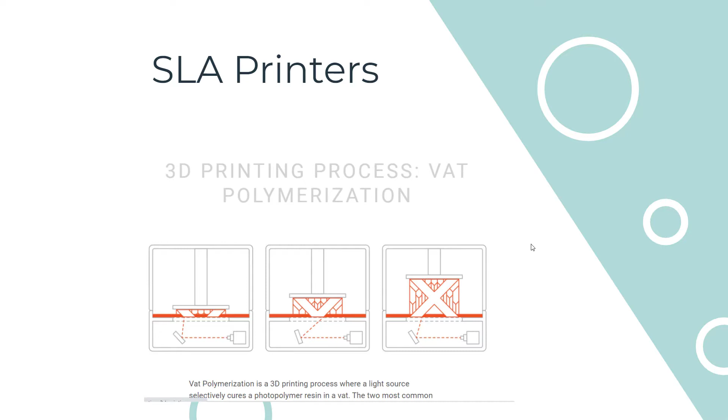All right, another type of printing I wanted to talk about—again, there's lots of types of printing. I've seen printers that do ceramic, printers that print metal, industrial 3D printers. But the other way printing is done that I want to talk about is these powder bed fusion printers, which is what you see a lot in medicine.

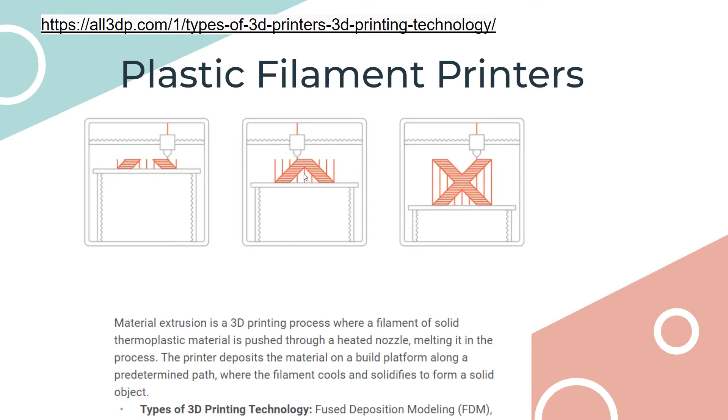So you've got a source of thermal energy hitting a bed of powder. In these prints, your print comes out of a bed of powder. That comes in handy with supports, because if something doesn't have a layer to build on top of, it will fall apart and plastic will ooze out of the nozzle. But when you have something like this, it doesn't need any support because the powder, like a sand texture, supports it, and you just lift it out of the sand as a complete structure.

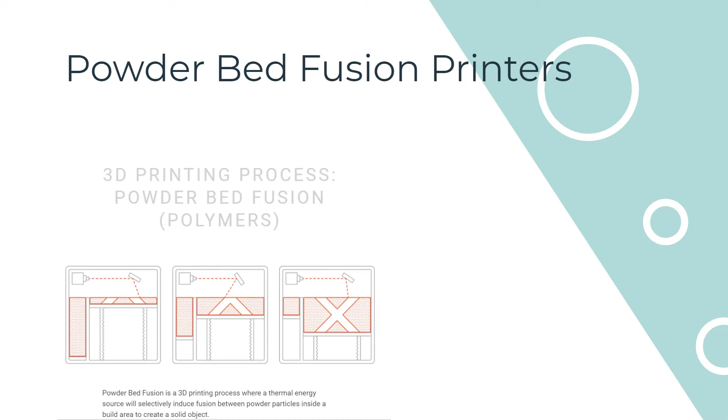So those printers can cost hundreds of thousands of dollars. I'm guessing it's about $500,000 for one that's about the size of—and they're huge. I've seen one that's like the size of a telephone booth. I just want to point out that there's more to 3D printers than consumer printers. I never want people to think that when we talk about 3D printers, we're talking about some little two-foot cube that costs $2,000 and is used in schools and libraries.

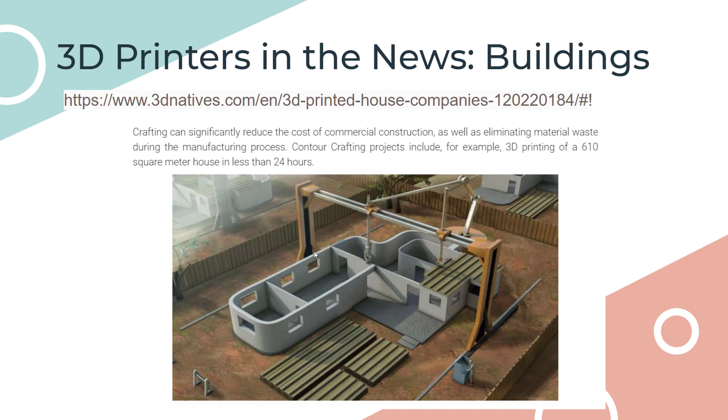This is the way a 3D printer could be used to build a house. There are some construction companies that do this. Just like the nozzle has plastic coming out of a filament nozzle, this has cement—same idea. The bar uses XY coordinates, but it's basically saying up, down, left, and right, depositing a layer of cement instead of plastic, following a pattern, and building up walls just like we build up walls with plastic printers.

Same idea. The other place we hear about 3D printers a lot is in food production, which I'm not going to get into, because I'll show you a cake nozzle with icing that kind of shows you can call anything a 3D printer.

But I do want to talk about the hype around medicine. I hear a lot of people talking about how they can print bone with a 3D printer. The little bit I know on the topic is that what they're printing is a material that helps bone graft onto it very well, but they are not printing bone per se. So if you go to your orthopedic surgeon wanting a disc made of your own bone printed on a 3D printer, they will turn you away, at least at the time of this recording in 2020.

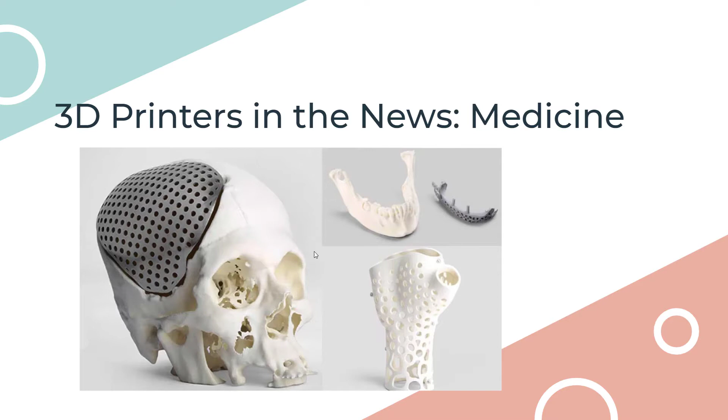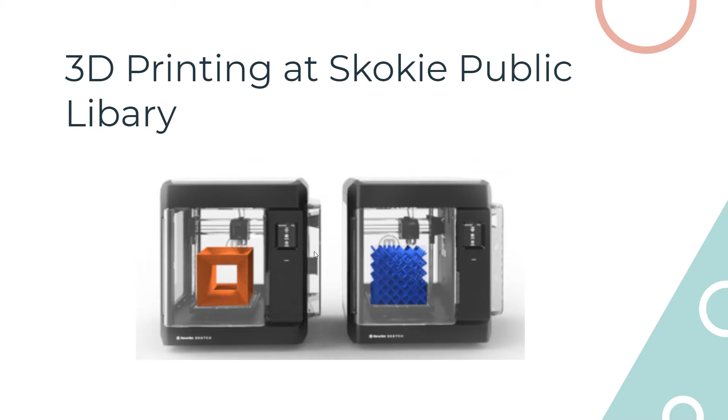The lecture I did this week was for the 3D printing program at the Skokie Public Library, but I think it has some overarching principles about how to upload and find a place to print your prints for free that are worth talking about. First, if you're willing to pay a good amount of money, there are places like Shapeways that will make your print for you. But your local library may have a program—Skokie's is extraordinary, and if I may, I'll take you to the site.

This is their 3D printing program, and they have a 3D printing request form. I only show this because there's going to be a moment where you're interested in 3D printing and you need to send your file to someone.

I want to show you that the principles of sending your file are the same as any other type of file, like a photo file such as a JPEG, or a Word file, a doc. There are a few different flavors and formats, but for this site in particular, it says we only accept STL files. So you would simply choose your file from your computer and pick it out.

Then you upload it. In this case, with Skokie Public Library, you would put in your name and email, and they have a limit to how much they do every month, but they would do your print free of charge. So I do want to highlight that program.

I also want to highlight that program because when I was doing this lecture, we geared a lot of the questions towards getting started with these things. So when we talk about file types and STL files, I'll talk about those later in the lecture, because this lecture goes from big to small — big things about 3D printing, but then it gets into the nitty gritty of file types and some of the more tedious things that have to be dealt with.

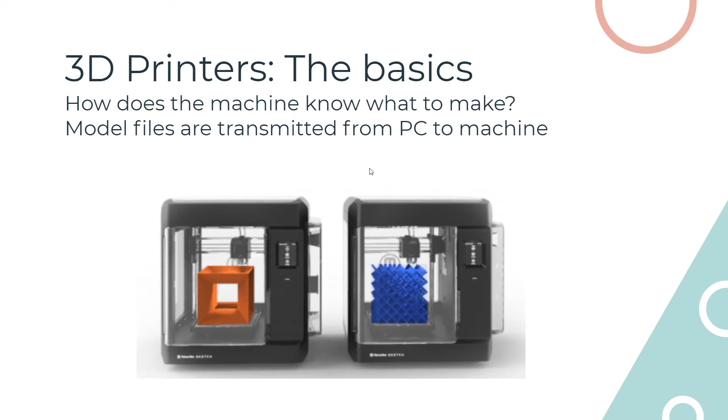So what I will do now is switch to a video I made that I will do the voiceover for and show how this works. I go through this very quickly, so I'm going to pause a few times as I go. But what I'm showing in this video is the workflow if you wanted to download a ready-made, ready-to-go printable file from Thingiverse. I start with the Thingiverse site and hit download all files on what I've selected.

Pick my spot on my computer, extract it — and that's where you do need to have enough computer skills to know how to download a file from the cloud and extract it. But once you do, you can find a 3D file viewer, like I have here. Open the file, and then you'll see this is the body of an owl.

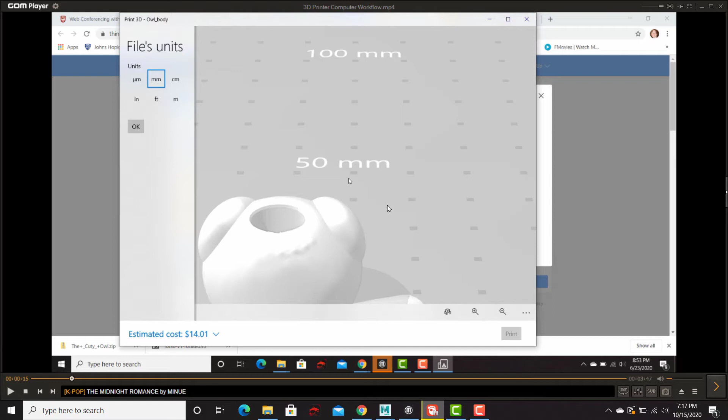It's a simple print, so we're going to see it in the viewer, and you can rotate it and look at it from a couple sides.

There are a few different types of software. I always say 3D printing gets pretty confusing pretty quickly because it's very simple — you've got your 3D printable file and you just have to manage it like any other file. But if you're going to print it yourself, that's different. If you're going to send it to a place like the Skokie Public Library, you take your file, download it to your machine, and upload it to their system.

But if you had a friend, or you knew somebody with, in this case, a MakerBot, you have to put it in the software that translates the file between a computer file and the brand of printer you're going to be working with.

So every printer needs some kind of slicer. That's what they call it, because it slices the print into layers and generates a special kind of code that the machine can understand. That code is called G-code. These slicers give you a very intuitive interface — you import your file, set up your settings, and then it conveys those settings to the printer.

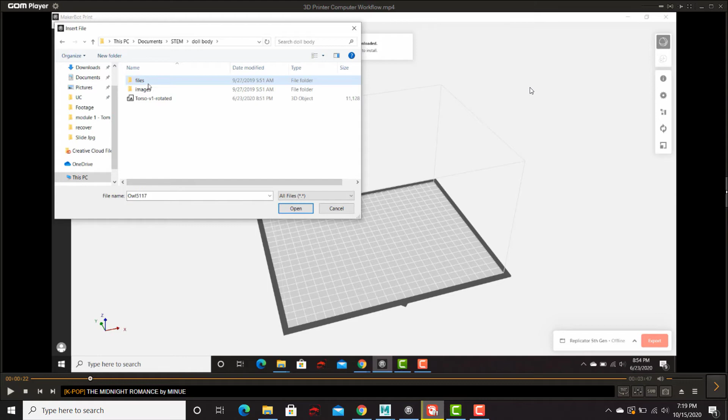Things like how thick you want your layer, if you want some sort of platform on it to help it print better, if you want supports, which we'll talk about in a little bit. Those are all the things that you would convey in your slicer software that would go into the printer as it makes decisions about how to print your print.

So I'm importing it into the MakerBot software. There's lots of different kinds. There's also wireless systems that send it to the printer. So that was how to do something on Thingiverse.

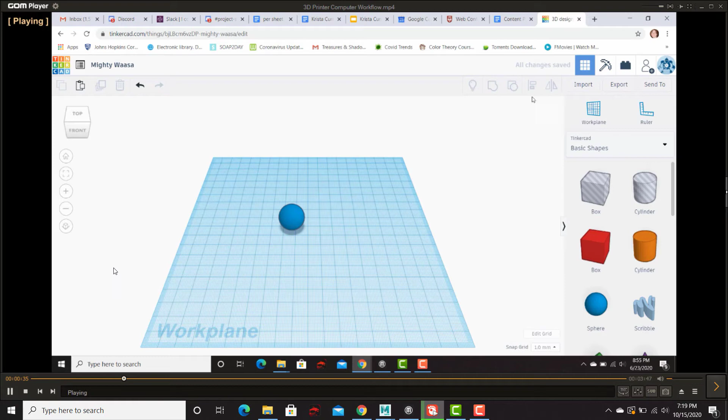I also do teaching about 3D printing and modeling where we do things in Tinkercad, which we'll talk about in a little bit. But here I'm doing the workflow of having made your own creation in Tinkercad, and this is how to export it and again put it into slicer software and send it to a MakerBot.

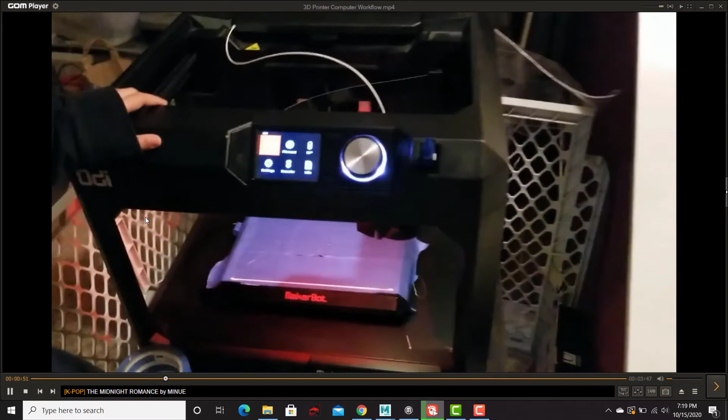So you just export it. In this case, I picked OBJ as opposed to STL, and it's on my machine. I transfer it using a USB device. See right here where my mouse is pointing, that's the USB drive. The printer has a USB slot right here, and that's where the file goes from your computer into the machine.

So this is what we call the bed. This is the interface, the knob that helps you control the settings and the settings.

So now we're going to get started with the printer itself. The first thing it has to do is make sure that the filament is melting properly. It's going to go through that nozzle, and it's going to be the right temperature. It's just going to all work.

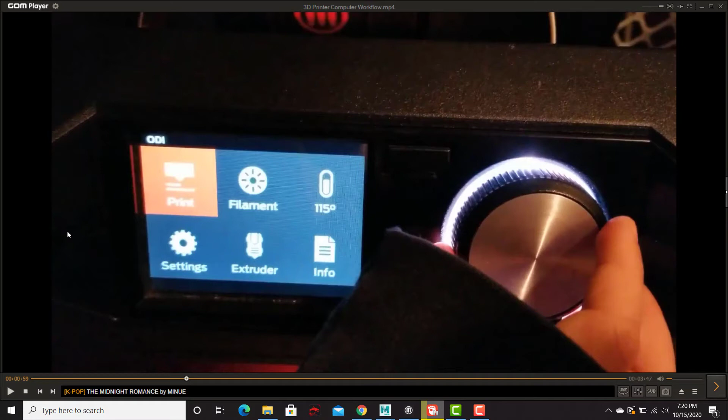There's a piece of the printer that we'll talk about in a minute called the extruder, and the plastic comes out of that. So the first thing you're doing is putting in your filament, which is the spaghetti looking stuff that's going to melt. And so you load your filament.

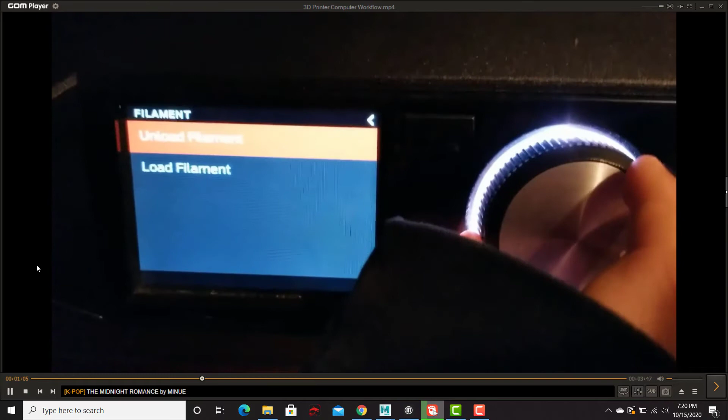What I'm showing here is that you can see the temperature is 115 Celsius currently, and it has to go all the way to 215.

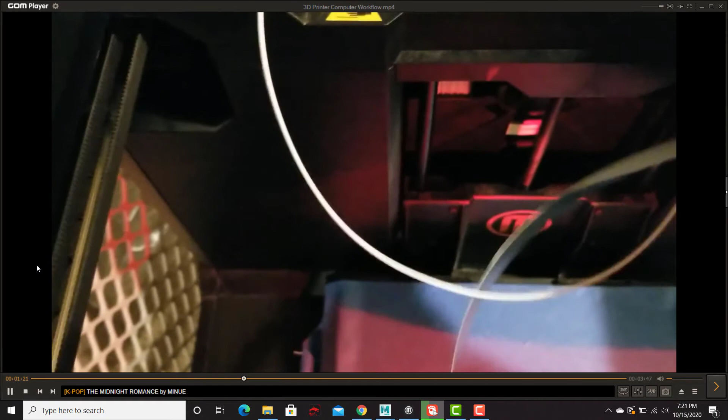So setting up your printer and getting ready to print takes about 10 minutes just to get your print working. It's just something people don't realize when they're going to make a 3D print, that there's a lot of waiting around and waiting for things to heat up and cool down.

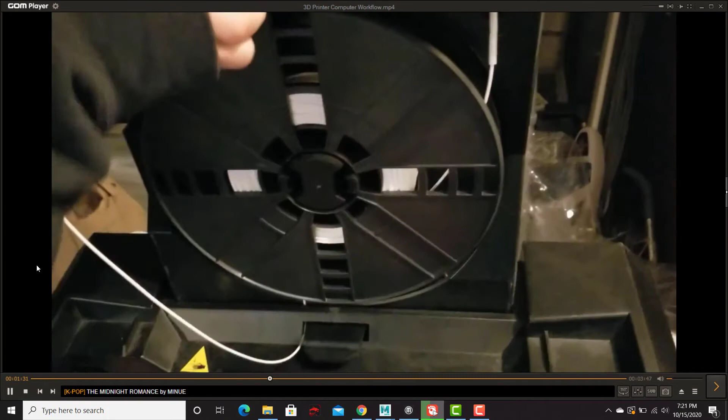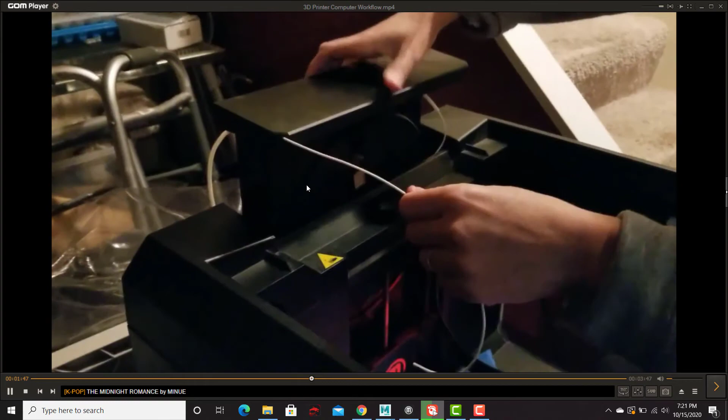This is the spool of filament, and the filament comes out of the spool, kind of like a film reel, and it goes through a connecting tube which connects to the extruder. So when you run out of your spool, you put in a new spool.

This is a very important part, the tension of your filament, this is for those of you who are going to be actually doing a print someday. This does not aim to be comprehensive training on how to do a printer, but you can see some of these considerations. This is where you slice your filament at an angle, so it has that nice sharp tip.

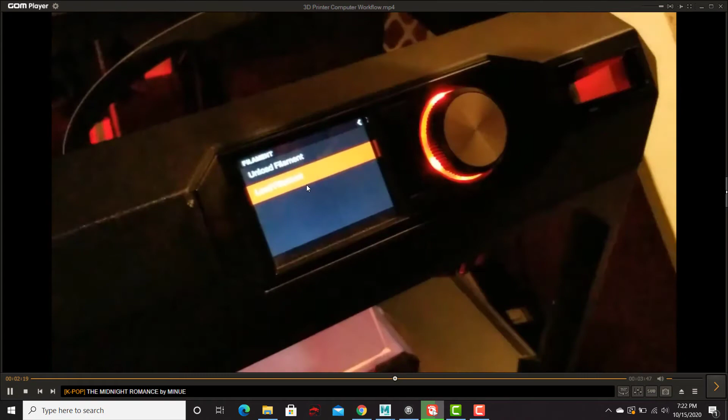And then we're going to show that we're ready to load the filament. The Smart Extruder is ready to accept the filament. You take it, you put it in the little hole, and you feel it pulling it in.

Eventually the filament comes out the other side as this melted plastic. You can see it kind of streaming out of there, and that means you've got a good flow going and your printer is working well. You can see it's dumping plastic all over the floor. That's me doing it with my hands and remembering that I'm doing this for the camera, so I need to cut it with the scissors.

And your printer is ready to go. The first line that it does when you hit print is a thin test strip. This is where you pick your print. Again, it was on that USB file. And we're printing a doll head.

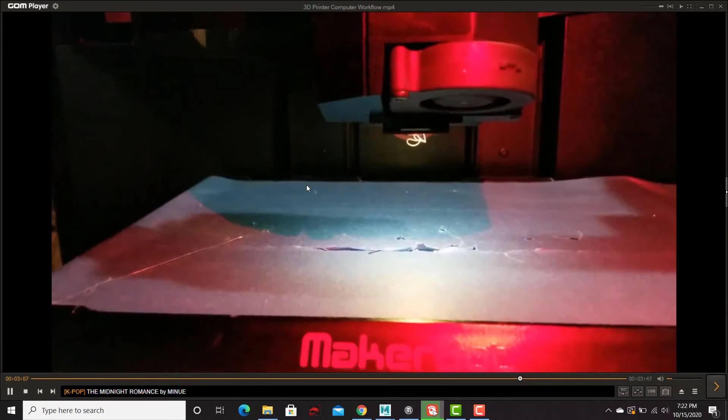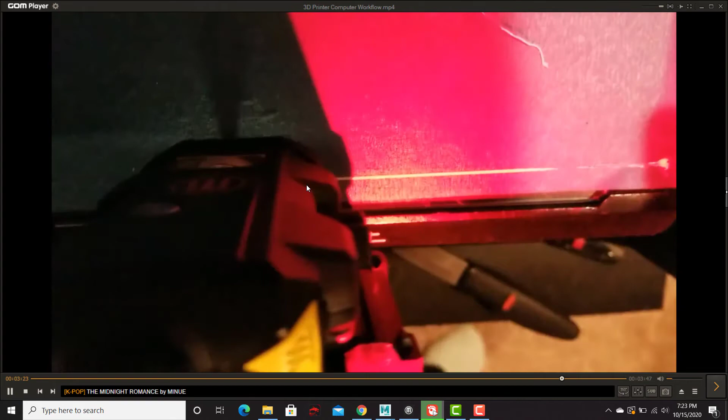This is our painter's tape that protects the bed. That is the extruder coming down towards the bed, getting really close to depositing that first layer. You can see the first layer getting printed right there. That's this test strip, and that's how the printer is making sure that everything is set up and ready to successfully print, starting with the first layer. This is footage of it printing.

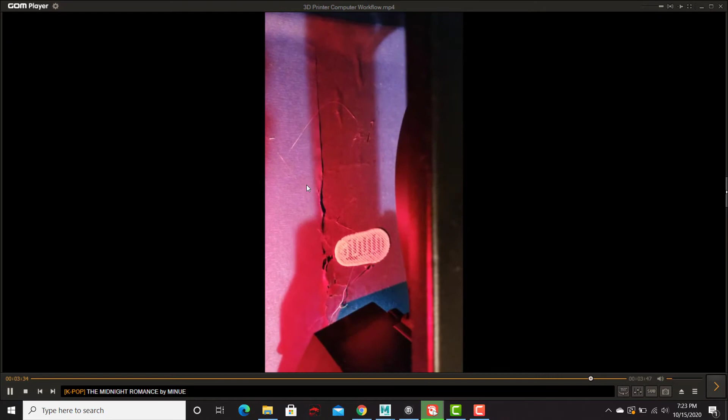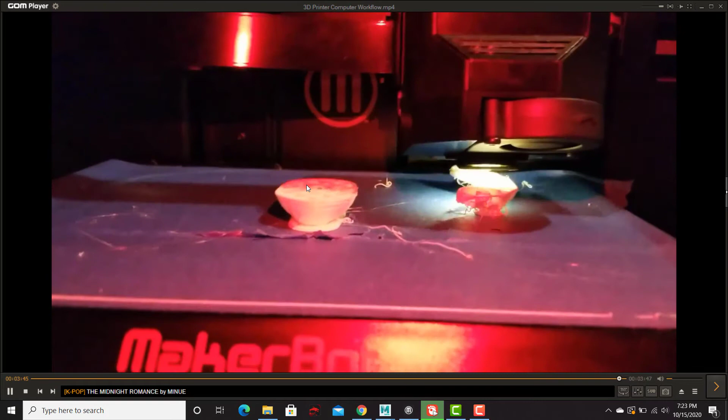You can't get close up to show the nozzle when you're doing this. Here's a little clip - I don't think you can hear the sound, but the printer makes some crazy noises - and that is the print. So that is the workflow of the 3D printing machine. We can't do a live instruction to show people how to use a 3D printer, but we can at least show that video so you know what it would look like if you were there.

All right, so this is the close-up of the nozzle. As I mentioned, you can't make a video of that nozzle coming down, so I do this instead, if you're ready. This is my demo of what it looks like when a nozzle is extruding plastic resin close up.

I use icing and this plate to represent the print bed. This is what's happening, and I explain this because I will show you how to design your design for 3D printing based on the physics of what happens.

The printer only knows a few directions: front, back, left, right, up and down, and that's all it knows. So it's going in those directions, or a combination, to go diagonally. It gets the direction to go to coordinate X 125, 250, and then it's told to go downwards. So it goes downwards, and then it's told to go to the left, and then it's told to go to the right, and it makes its first layer and comes to a complete stop.

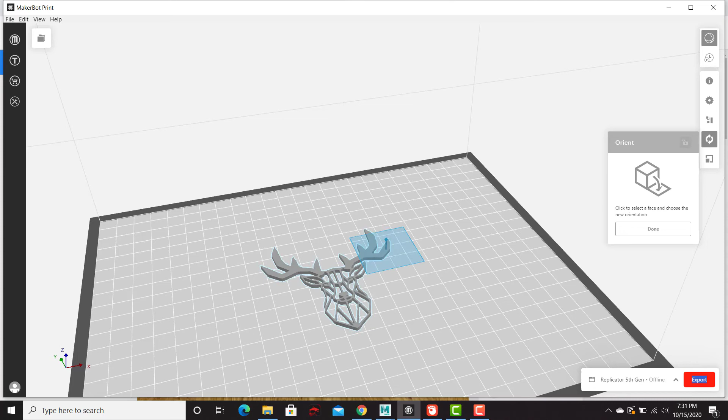So again, we're back in our slicer. This is a very easy to print object. It just is a flat surface. There's no problems with this printing.

This is very likely to be a successful print. But say for some reason, for the sake of your print, you needed to print it like this. That would be very, very challenging for a printer. The printer would not be thrilled about printing a shape like that, because you can see where it'd be putting a lot of extra filament onto the bed and just dripping it down.

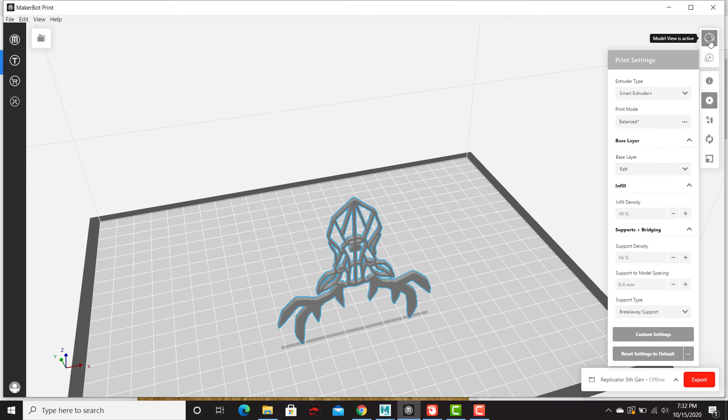So what you do is you're going to build in supports. It's kind of like a call for help. These supports are cumbersome and a little bit difficult to pluck off as of 2020, but this is the way it is done today. So you would specify that you want supports, and then I'll show you what those supports look like in the print preview.

So those are your supports. You can see that it would deposit a tremendous amount of plastic just to hold up your shape.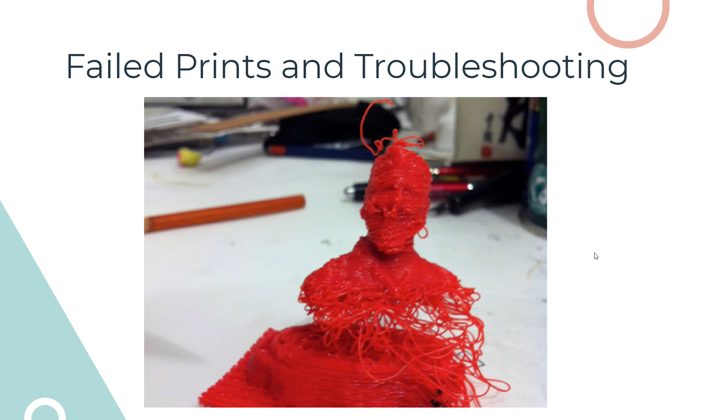So I mentioned failed prints, and this is a good example of what a failed print looks like. Again, when the nozzle has just been depositing plastic into thin air, it tends to look like that, and you can see that it's ruined. And you don't try to fix a 3D model, you just print it again.

Okay, the final part of this lecture is what I spent a lot of time on in real life, but it's the topic of making your own models and prototypes. So as we talked about, you can go on different sites and you can download models, buy models, but it's funnest if you're interested and if you've got something you want to make, making your own models.

So the rest of this lecture is pretty much dedicated to helping you understand the right software that you should learn to make your model. The reason I belabor this is that what I'll show you about these different software programs is that all of them are completely different. And if you learn one type of modeling software, you've literally learned one type of modeling software, and that will not help you at all when you learn a new software system. You will literally be starting over.

So I'm going to show you a little bit about how all of them think about design differently, and how you would really have nothing that carries over from one program to another. You would have ideas about ideas like resizing a sphere, but how you do it, you'd have to learn in every single system. So let me start out with talking about the software that I use when I teach kids how to do 3D modeling.

This is Tinkercad. Tinkercad is the simplest software that you can use. You need a login to start, but you can pick any object in the gallery. I'm picking something I made already, and I am opening a file.

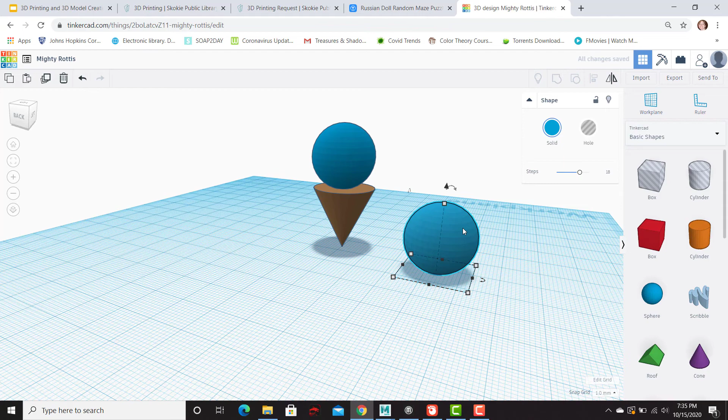As I always teach everybody, when you click on the object, you can see almost an iconic set of directions. You have to learn that the Hershey Kiss means you pull it up. If you see these arrows, that means you rotate it, which won't look like anything because it's a sphere. These things here resize it, and then you can rotate.

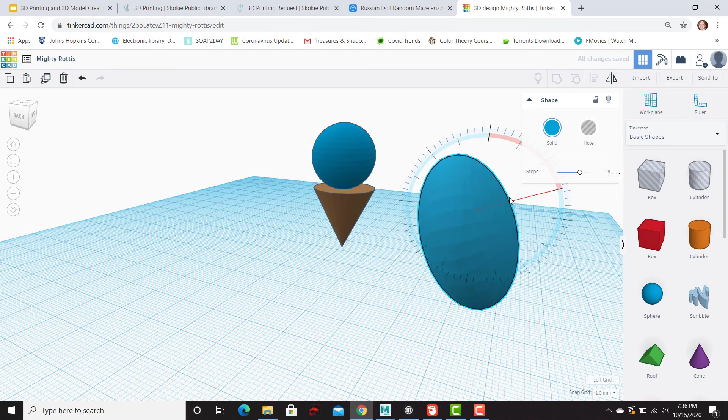So those basic movements of moving, scaling, rotating are in every piece of software. And that's about all they have in common.

The next piece of software I want to show you is Autodesk Maya. This is what I've used the most, but again, I do video game design and my focus hasn't been on 3D printing when it comes to model creation. I just want to show you the huge range, like the difference between professional software and children's modeling software. The demo I always do is the following. So I make a shape like this.

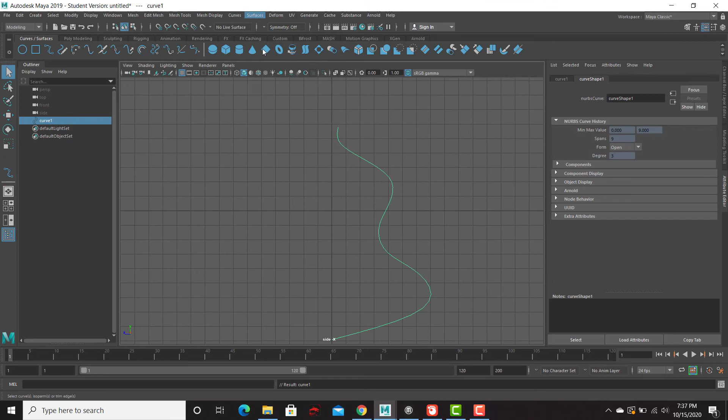And so I have my shape, and imagine this as a pottery wheel on this axis, spinning around to make a shape that would almost look like a vase or a ghost. So you say surfaces, revolve, and it looks like that.

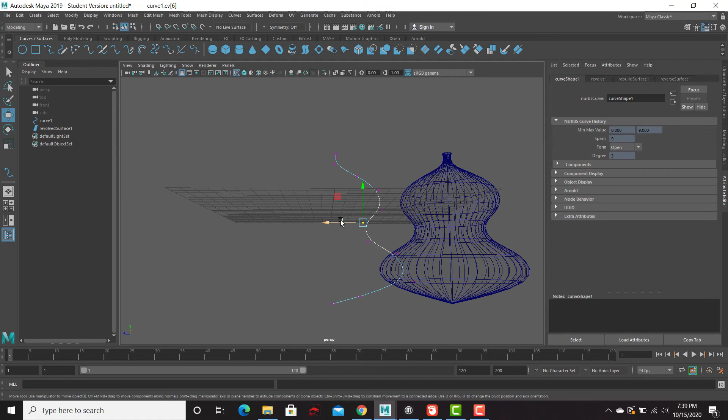But I want to show you how. Okay, let's turn this into a wireframe and move it to the side, and go back to this original curve. I do this to show how much control you have with these advanced types of software. When you move the curve, you can revise your shape and do all sorts of things to reshape it.

So anyway, I do that to show the huge difference between dragging objects in Tinkercad and this software that you invest in learning. There are tons and tons of buttons in Maya, and I'm always showing just one menu bar. This is the modeling bar, and then these are the surfaces and the curves. It gets into sculpting, and then into a lot of rigging and animation.

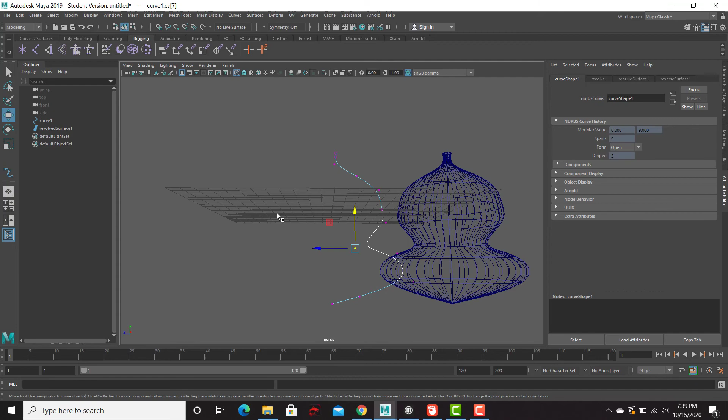The last one I want to show you, just to show the difference, I'll talk about all of them, but the last one I'll show is Autodesk Fusion 360. Other big brands are SolidWorks - for people who are engineers and the company supplies their software, a lot of them use SolidWorks. Unlike everything else where you can get a free license right now, SolidWorks is thousands of dollars. And then there's Blender and Rhino, which are also 3D modeling programs that have been around for a long time.

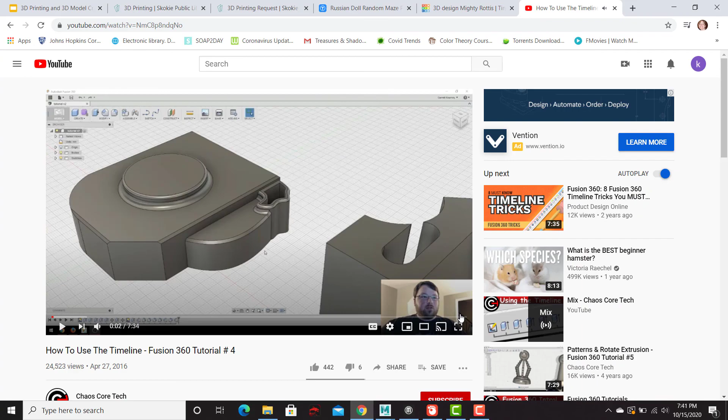So what I want to show in this video is this Autodesk Fusion 360. I want you to look - it's a little difficult because the scroll bar is there, but look at where the scroll bar is, this section down here. I'll move my mouse out. But see that? Those are all the different steps that the model has been through.

So what you can do in Fusion 360 is what they call parametric modeling. I want to explain this one concept because it's really a breakthrough as you get into more sophisticated shapes and prototypes that have to work and do exact measurements. You can go back in time to the moment where you added this block in this way, and you can edit it and change it.

And then keep all the subsequent steps exactly the same, so you don't have to go back and do it again. You just go back to that step, revise it a little bit, and then all the rest of your steps take effect. That's one of the huge differences between Fusion 360 and something like Autodesk Maya, or obviously a child's software like Tinkercad.

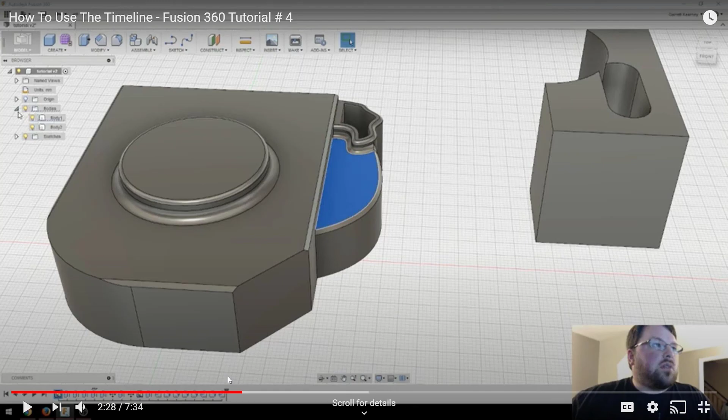The last thing I want to talk about is subtractive printing. Everything we've been talking about with 3D printing so far is what they call additive manufacturing, which means you're adding layer after layer of plastic or ceramic or whatever it is onto a layer. Well, there's a type of printing called subtractive carving, and that's the art of taking a digital model, just like we have with our OBJs, but instead it teaches a machine.

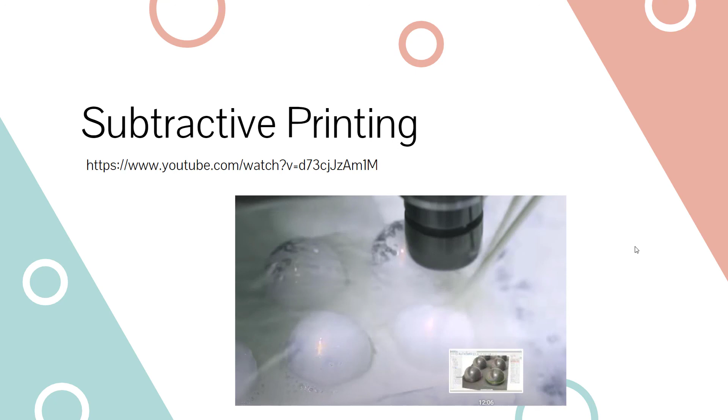So that is it, that is the end of my lecture, and I hope you found this helpful. I hope if you get put in a position where you have to do an overview of 3D printing for beginners, that this will save you some time in creating your own lecture. And thank you for watching, and I'll see you soon.